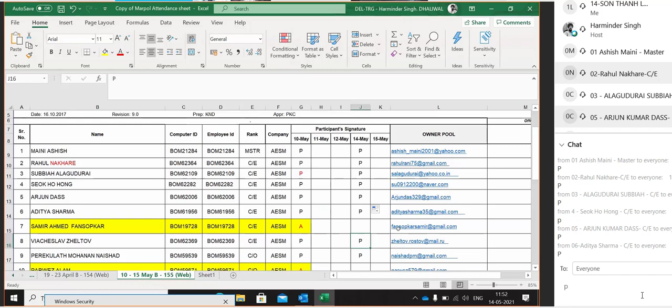Has anyone of you sailed on vessels with scrubbers? Anyone of you have sailed on vessels which have been fitted with the scrubber? Mr. Rahul Nakre, thank you.

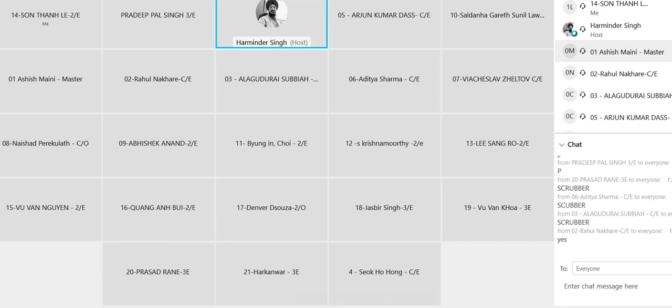Would you please switch on your mic and video also if you want to? It's up to you. Would you please share your experience as to whether the installation was done at your time, and how was it running the vessel with the scrubber? Any problems that you faced, etc., etc.?

So I was there for the installation itself, and then I sailed with the vessel for 1 month after that. In that 1 month, we did not face any major problem, but the system there, it was an open loop type system. So all the effluent was sent outside only, and it had two scrubber towers, three big seawater pumps, and then there was one dilution pump also.

And the water was just from bottom, it was pumped up to the top to the lines, and then there was a return line which had got a leak detection system also, in which if there is pipe leakage or scrubber is leaking, then a separate tank will get filled, and it will trip the seawater pumps. So there was monitoring of pH, turbidity, and PAH. And these all things were recorded. So that is how the system was working.

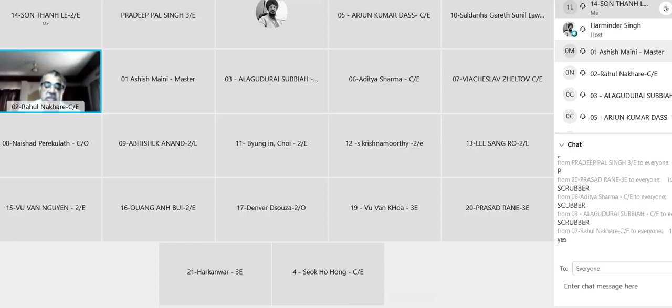We only had one problem during rolling. The scrubbing water was overflowing into the leak-off side. That's why at that time the pumps had tripped. But otherwise, there was one small leakage due to improper workmanship in China. That one scrubber, the outlet sensor for pH, that fitting started leaking. So these were the minor problems faced. But later on, I heard there was a problem with the expansion bellows which are fitted on the exhaust side. Those were giving up in a very short duration of time.

Hello. Anything regarding record keeping and all? Record keeping we have started, but the date was not yet due. So there was a complete logbook for it, record logbook. All the values that I told you, recording the flow rate, the pH value of incoming seawater inflow, their pH and turbidity was measured, and at the outlet, where it was discharged overboard, pH, PAH, and turbidity was recorded.

And then there was maintenance like monthly calibration, then annual calibration. There are different test gases also provided.

Yeah, this is very important because this is again an NPDES requirement as per the US laws. That's so good. Thank you, sir, for sharing these. I'm sure people will find this information handy. And also, while I'm discussing scrubber, if you feel you can add a point or two, I would appreciate it in between. I would stop and then you can chip in your points in between also. Yeah, sure, sir, sure.

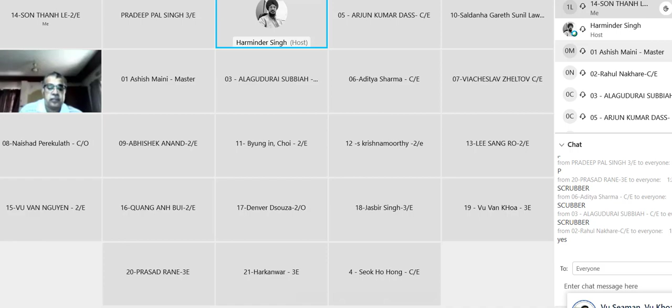So let's begin with the scrubbers in this session. So scrubbers, as you know, is largely referred to as the exhaust gas cleaning system, that is EGCS, exhaust gas cleaning system.

Okay, now just a minute, let me pull the PPT out so it becomes easy for you. Are you able to see this on your screens? Kindly confirm.

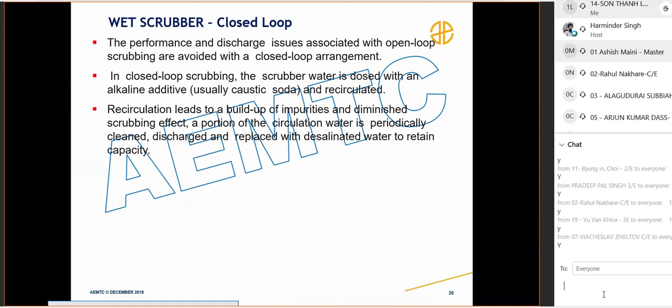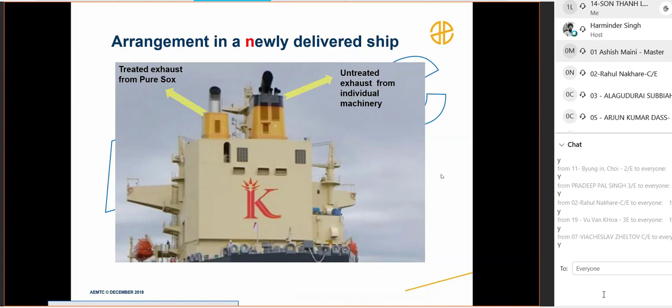So can you see this? This is not pure SOX. Pure is the brand name of the scrubber, so don't think it is a pure SOX or something. I hope now you are familiar with the look, how it would look externally. Can you please confirm?

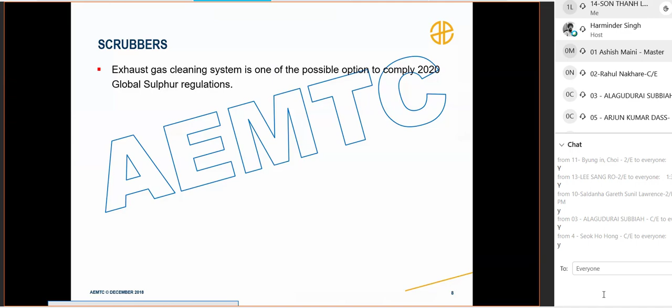So let us now have a look at scrubbers and one by one we shall try to understand things. Exhaust gas cleaning system is one of the possible options to comply with the 2020 global sulfur regulation.

So 2020 global sulfur cap is what? 0.5% sulfur by weight is to be used on the fuel that has to be used on ships all over the world, except for the ECA areas where for compliance you need to burn fuel of 0.1% sulfur. So this is the global cap on sulfur, and this is the ECA area sulfur cap. Is that clear?

Good. So, are you aware of... that I'll talk about a little later.

Scrubber is a device installed in the exhaust system after the engine or the boiler that treats the exhaust gas. Actually, the name suggests scrub. Scrub means to clean, isn't it? So it is basically cleaning the exhaust gas.

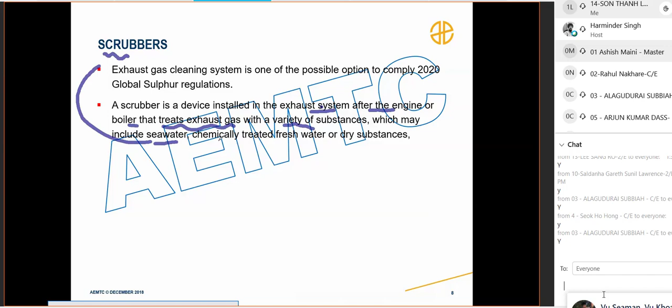It treats the exhaust gas with a variety of substances. That substance could be seawater, used for the purpose of cleaning, or chemically treated fresh water. Now the term chemically treated fresh water, why? And then dry substances, okay.

See, once you are using seawater for the purpose of cleaning, seawater can be discharged overboard after complying with the MARPOL regulations. However, if you use fresh water, you cannot just clean it once and throw it out, isn't it? Fresh water comes at a cost, so you would rather try to use it in many cycles.

And exhaust gases are corrosive in nature, we all know that. So the acidity of the clean water or fresh water that you are using for scrubbing, once they come in contact with the exhaust gases after scrubbing, will get acidic in nature. So we need to bring down the acidity, or we need to add alkalines into it. That is why you would be adding chemical to make it alkaline or to bring down the acidity of the clean water or fresh water, so that we can use it over and over again for a number of cycles before it becomes so contaminated that we need to discharge it ashore.

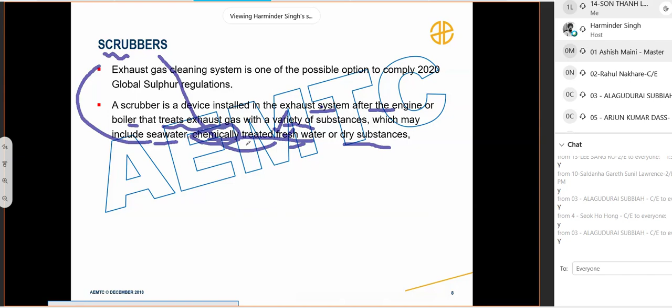Clear? You understand why chemically treated fresh water now? Please confirm.

The goal is removing most of the SOx from the exhaust and reducing particulate matter. This is the essence of fitting an exhaust gas scrubber, or the so-called exhaust gas cleaning system. What we want to bring down from the exhaust is the SOx, that is sulfur dioxide and trioxides, and the particulate matter that is coming out of the exhaust.

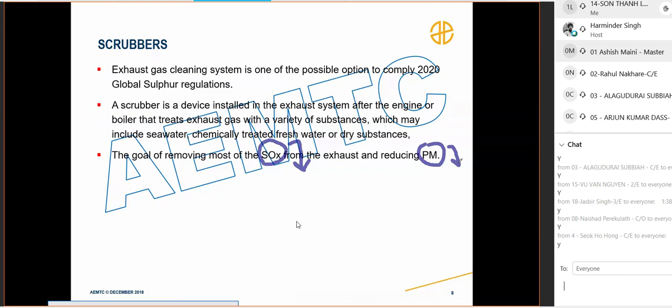All these scrubber technologies create a waste stream containing the substance used for cleaning purposes, plus the SOx and particulate matter which has been removed from the exhaust. So while the exhaust gas is cleaned, a stream of waste is generated. Let us say you are using seawater to clean, so seawater will be mixed with the SOx and particulate matter, and this will comprise the waste stream.

So as and when I show you how this waste stream is generated and where it goes, you'll get more clarity on it in the subsequent slides.

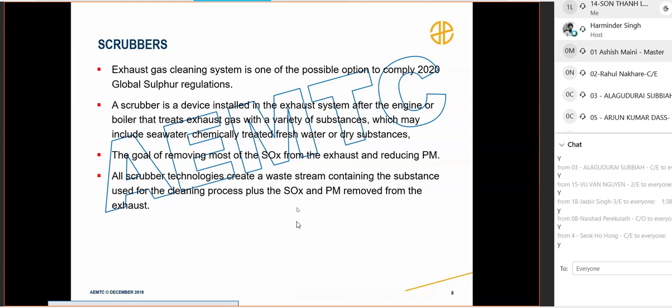The wastewater stream and generated sludge has to be processed. We just cannot throw out this wastewater stream that is generated out of the scrubbers into the sea. There is an IMO regulation or IMO guideline that we need to adhere to before we can actually discharge this waste stream overboard. Is that clear?

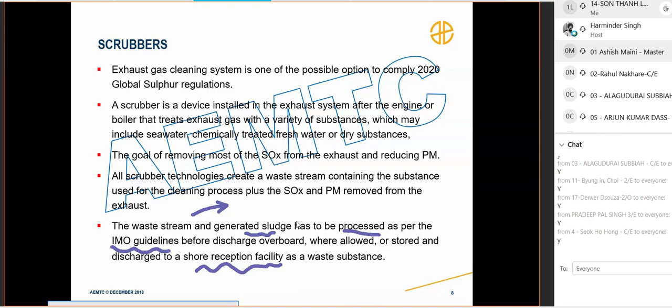Okay. Or what we can do is discharge it to the shore reception facilities, which of course comes at a cost.

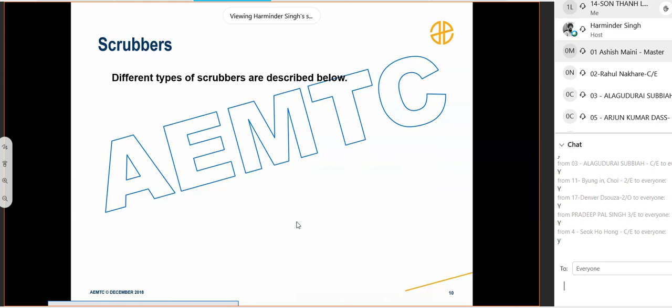A scrubber may either be a wet scrubber or a dry type of scrubber. The dry type of scrubbers are seldom used in the marine industry. You will not find any ships which have so far been fitted with a dry scrubber.

However, for the purpose of cleaning in dry scrubbers, we use lime granulates. But these are seldom used because we need to have a separate storage tank for these lime granulates, and then we need to discharge it ashore. So a lot of complications are involved with it, and these are then not preferred.

However, just a second.

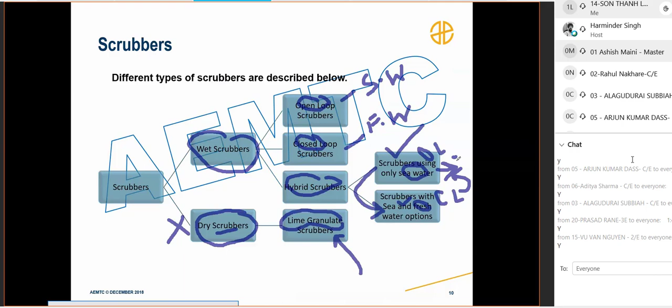Good. So just a short brief on the dry type of scrubbers. Although not a single such scrubber has been installed on a ship so far, lest you come across it, we'll cover this slightly.

Dry scrubbers do not use water or any liquid to carry out the scrubbing or cleaning process. It exposes hydrated lime treated granulates to the exhaust gas, meaning the granulates are in one place and the exhaust gas is made to pass through them, to carry out the chemical reaction that removes the SOx compounds. The exhaust does not pass through water. Since no water cleaning is done, the exhaust will not get cooled down.

In wet type scrubbers, since it is done using water, obviously the exhaust gas going out will also be cooled. But in dry type scrubbers, cooling will not occur. That means we can fit the scrubber even before the exhaust gas economizer in the exhaust piping system. So that is the only advantage - it gives flexibility of fitting a scrubber wherever you want in the exhaust system.

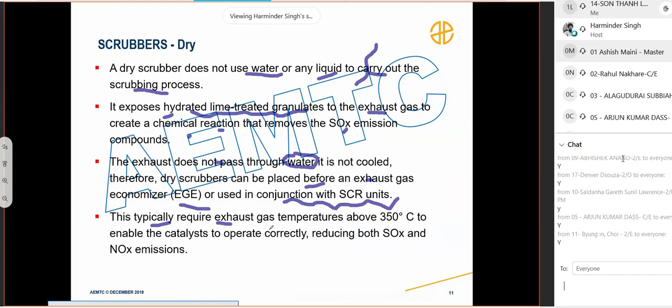So a dry scrubber can be placed before an exhaust gas economizer, or used in conjunction with SCR units for NOx control. This typically requires exhaust gas temperatures above 350 degrees centigrade, because it utilizes a catalyst that works best at and above this temperature. Is this part so far clear?

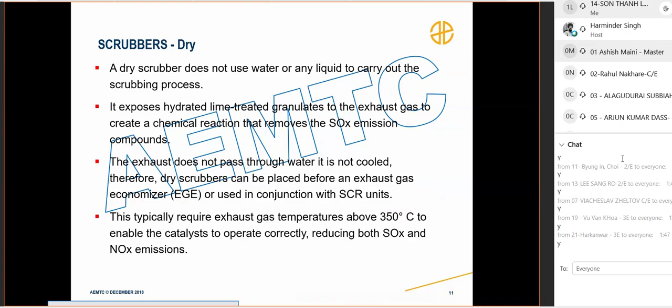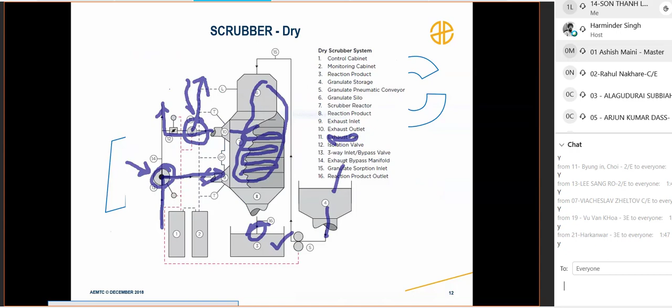Further, you will see that the waste stream, whatever is there of the granulate silo, is also being generated. Once this granulate silo is used, it has to be stored. So we need to have so many tanks for the fresh granulate silo lime and for the stored material, and that is why it is not often used on ships.

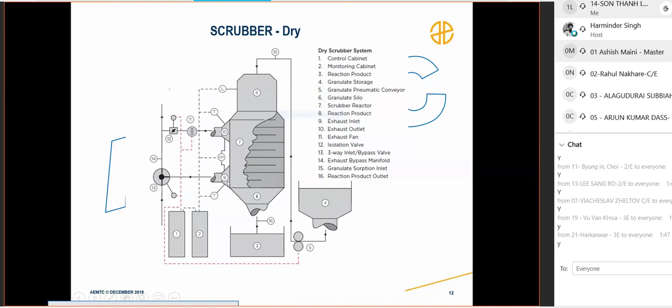Now talking of the wet type of scrubbers, the exhaust gas passes through a liquid medium in order to remove the SOx compounds from gas by chemically reacting with parts of the wash liquid. The system can either be open loop, which uses seawater, or closed loop. Hybrid systems offer both methods of scrubbing. The most common liquids are untreated seawater and chemically treated fresh water.

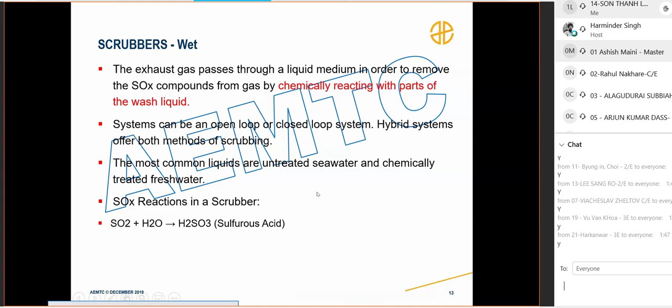So the SOx reaction in the scrubber is that SOx, when it comes into contact with the water, forms sulfurous acid, which is corrosive in nature, which then further reacts with oxygen to form sulfuric acid. So this is how a wet type of scrubber works.

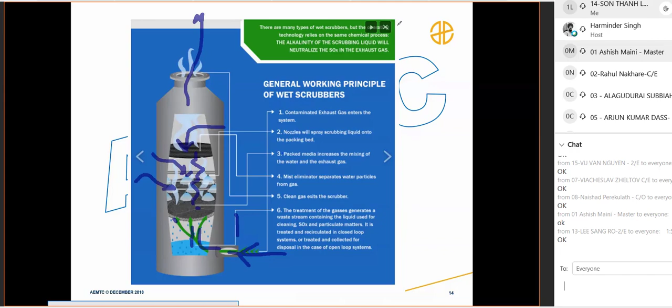Now, an open loop arrangement scrubs the exhaust gas directly with seawater, which is then legally discharged as per the regulations into the sea. If it is an open loop system, you see only what you are using is seawater for the purpose of cleaning. Obviously, the cost is less, and the operating cost of running such a scrubber is going to be less. This involves the least amount of equipment, which means lower investment cost and simpler installation. Likewise, it would also mean the lowest possible operating cost since there are no consumables involved.

However, an open loop scrubber system may not perform adequately in waters which are high in acidity or which have low alkalinity content. See, try and understand: the seawater is being pumped into the scrubbers, cleaning is carried out, and then the seawater is thrown out. Now, if the incoming seawater itself is more acidic, what cleaning will it carry out? Because it will combine with the sulfuric acid of the exhaust gas more and more, and its cleaning efficiency will go down.

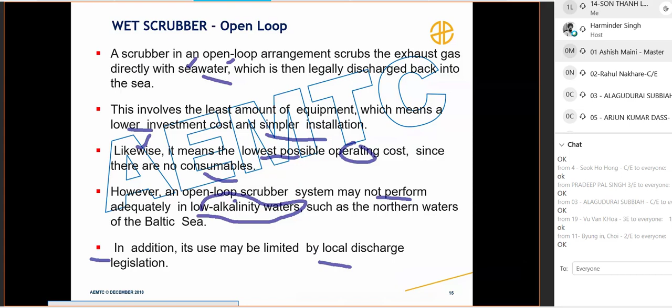Moreover, you will see that open loop scrubbers are largely discouraged by the countries. So far, any question? If no question, just type in NQ.

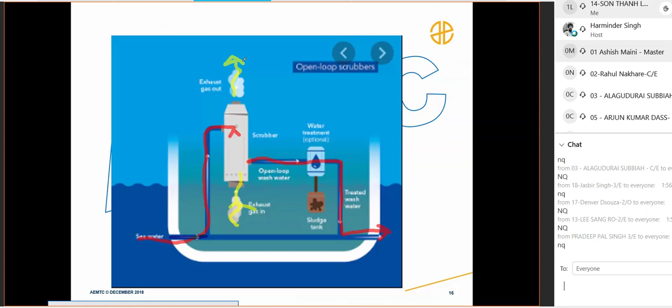So exhaust gases which are clean will be coming from here. Exhaust gases from the engine, from the main setup, will be coming from the bottom and will pass through. Please confirm if the open loop structure is pretty clear to you.

So you can easily see here the nozzles are there for the purpose of spraying the seawater. Then the demister is there on top. Exhaust gas comes, it is cleaned in the process, and the clean exhaust gas goes up.

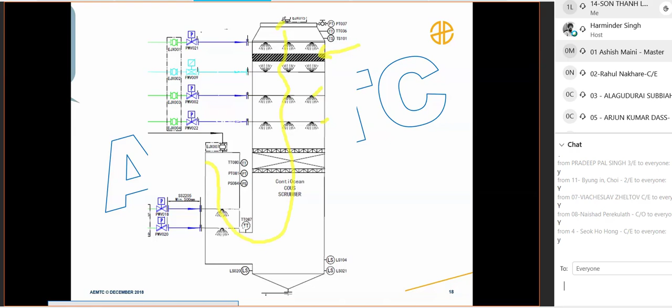So I have a question. Yes, please go ahead. Is this the same working principle as the inert gas system? In reality, the gas going out will be inert gas, is that correct, just without the sulfur dioxide? Yes. Our purpose is to remove sulfur dioxide and particulate matter, isn't it?

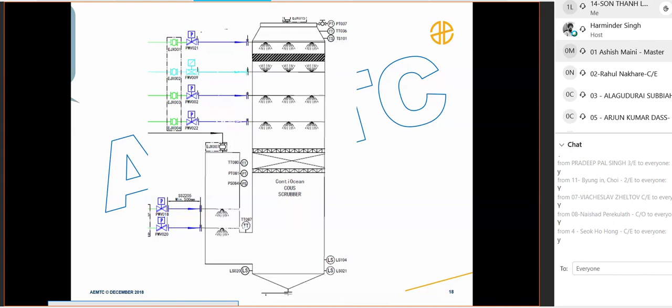Okay, let us now look at the wet type of scrubbers. Open loop. There is an issue with the open loop scrubbers. If the seawater itself is less alkaline, as is the case when operating the vessel in the Baltic Sea, then the efficiency of this type of scrubber largely comes down.

So what is the solution? So what we do in the Baltic Sea, if you go towards the north, you will see that the acidity increases, or the alkalinity decreases.

So the solution lies in, let us say, either you can switch over to the compliant fuel, that is 0.5% sulfur, and put the scrubber out of use. Or if you wish to use a scrubber, then it would largely depend upon... just a second.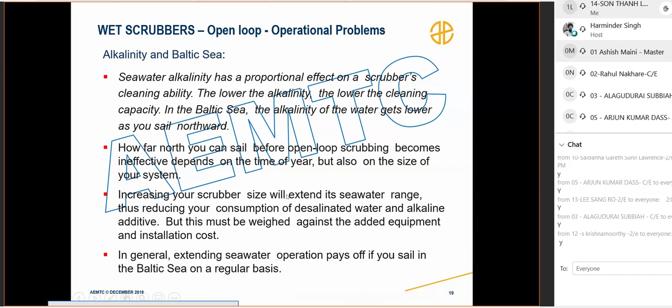Now let us talk about the other type of wet scrubber, that is the closed loop scrubber. The performance and discharge issues associated with the open loop scrubber mean that its use is limited by the outside seawater available for cleaning. But when you are using fresh water in a closed loop system, this issue is no longer there.

So in closed loop scrubbing, the scrubber water is dosed with an alkaline additive, usually caustic soda, and it is recirculated. The fresh water is recirculated over and over again. So as and when the fresh water starts to become acidic, more and more caustic soda dosage is added. So this is being recirculated.

Obviously, you are using fresh water which comes at a cost, and then you are also using the alkaline additive in the form of caustic soda, which also comes at a cost. So can I say that the closed loop scrubbers are obviously going to have a higher operation cost compared to the open loop scrubbers? Do you agree with me?

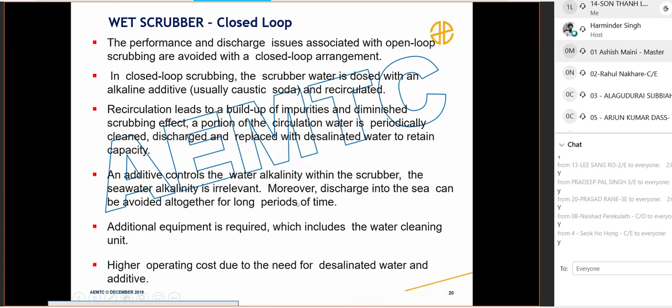This is how a closed loop scrubber would look like. You can see the seawater simply comes in, cools the fresh water, and goes out.

Whereas the fresh water is continuously circulated, it gets cooled, it is sprayed from the nozzles here, cleans the gases, and is taken into the process tank. This processing tank also has a freshwater addition point. If any freshwater needs to be replenished, it can be replenished here. Else it can go on recirculating, and of course an amount of alkali is dosed into it.

So this goes on and on till such time impurities build up to a level that you can no longer use this water. Then you can head it to the water treatment unit where it can be treated and made fit to be discharged ashore or to the sea, or you can even land it ashore to the shore reception facility. So this closed loop scrubber is clear to you?

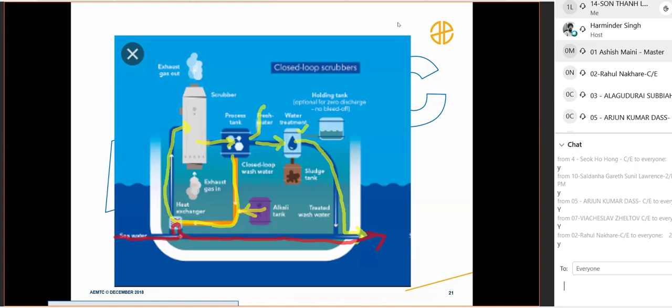Hybrid scrubbers offer an arrangement which is an ideal compromise between the cost efficiency of open loop scrubbing, which can be done at high seas, and operational security of the closed loop scrubber, which you can do in the restricted waters of the ports.

That is why hybrid scrubbers are very popular. In a hybrid scrubber system, both open and closed loop modes are available, ideally at the push of a button. Simply put, a hybrid system operates in open loop mode whenever possible, which reduces the operating cost.

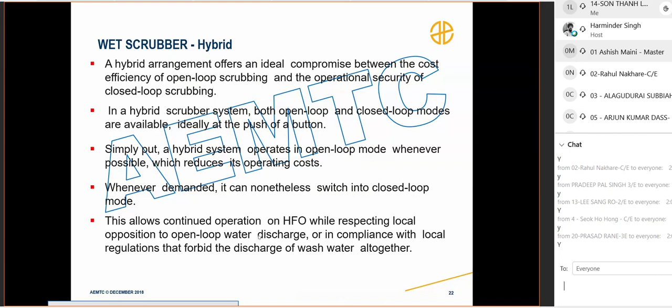Now let us study the environmental impact of these scrubbing systems, or the exhaust gas cleaning system, or the scrubber, versus the use of low sulfur fuel.

Marine SOx scrubbers are generally of the wet type. This means they scrub the exhaust gas either with seawater or with desalinated fresh water plus an alkaline additive. In the process, SOx is first dissolved and ionized, then oxidized into sulfates. So the end product that is formed is a sulfate.

These sulfates are a natural part of both the seawater and aquatic organisms. This means for the seawater flora and fauna, sulfates form an integral body part, so they are harmless to the environment. Hence they can be discharged overboard, so the discharge problem is sorted out. The only thing we have to monitor is that the water being discharged is not too acidic. Do you agree with me?

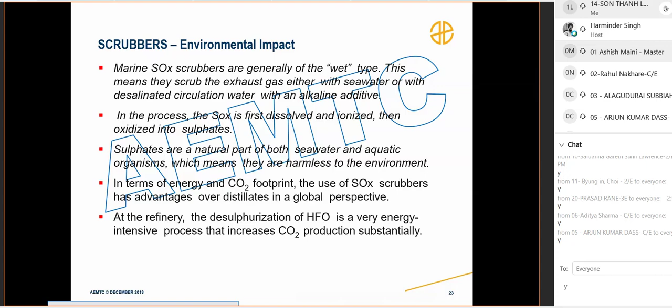You can see that this again contributes to an increase in CO2, so even low sulfur fuel causes harm to the environment. But with the use of scrubbers, this desulfurization process is not required at all. You can directly use high sulfur fuel in the scrubbers, which would at least reduce the CO2 emissions. So it is a win-win situation, both environment-wise and cost-wise. Do you agree with me?

Let us now see a few things regarding scrubbers. When we are using scrubbers, some additional things are also to be fitted. Dry scrubbers need a lot of handling space for storing lime and gypsum, so they are not preferred. The lower portion of wet scrubbers handles corrosive acids, particularly where the effluents are discharged. The waste stream is discharged from those portions, which handle highly corrosive acids and chlorides, so they may get wasted away very quickly.

That is why a special class-approved duplex stainless steel material is to be used. In some ships, the stub pieces on the overboard side valve gave way and a lot of water came inside. So a lot of these things can happen. To prevent this, you will see that on the exhaust side, the effluent side, stainless duplex steel material is specifically used for the pipeline and for handling these.

Scrubbers may need a bypass arrangement to exhaust gases for the period when the scrubber is not in use. So if you are not using the scrubber, let's say you have changed over from the scrubber to compliant fuel, like suppose you go to California. In California, they say even if your scrubber is good, you cannot use it, so they have banned the use of scrubbers.

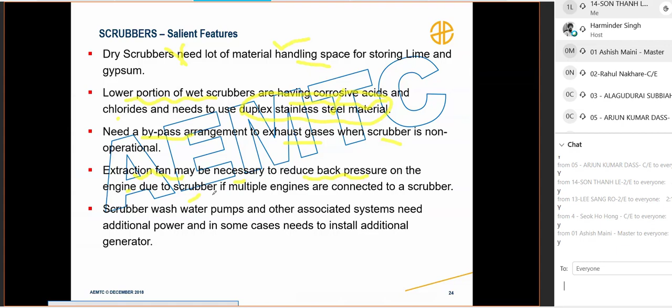Extraction fan may be needed to reduce the back pressure on the engine due to the scrubber, if multiple engines are connected to a scrubber. Scrubber wash water pumps, additional pipeline system, seawater pumps will be required, and energy consumption will be there. For that, maybe an additional generator is required, or a higher capacity generator may need to be installed. So these are a few things which a scrubber would need.

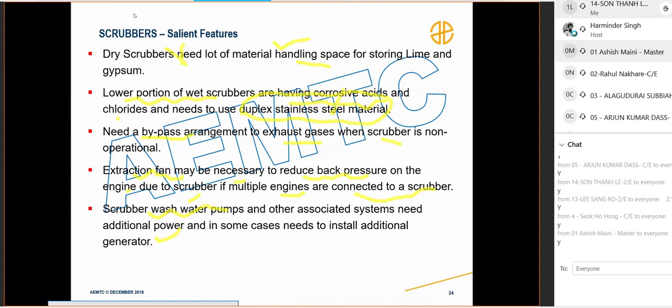Is this part clear to you so far? If it is, please confirm okay. Please confirm okay. Is it getting too boring, or are you understanding things? Is it getting too boring? Let me know.

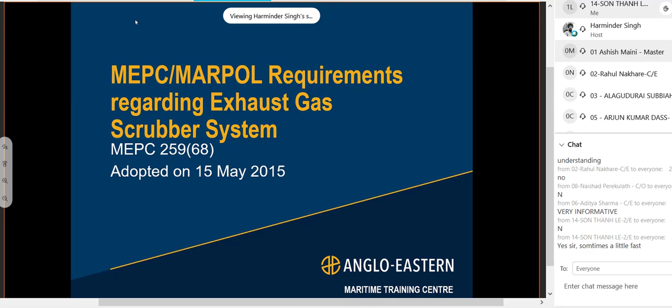Similarly, how can we say that the discharge going out of the scrubber is equivalent to or as clean as the low sulfur fuel discharge, or 0.5% fuel discharge? There has to be some parameter governing that. Do you agree with me? Yes or no? We can only compare two things if there is some parameter which says, okay, this is a discharge from the low sulfur 0.5% sulfur fuel, and if your scrubber is cleaning the exhaust gas and you are claiming that it is cleaning, your parameter should be at least so much equivalent. Then only can we say that your scrubber is as good as the use of low sulfur fuel.

So what is that parameter? Any idea? What is that parameter - the alkalinity of water, the turbidity of water, and the pH value? Okay, these are the parameters which are governing the discharge of the waste stream into the water. But my question is, I'm talking about the clean air. How can you say that the air emanating from the scrubber is as clean as that of the low sulfur fuel?

So the gas going out is monitored. The SOx percentage is measured, even CO2 percentage is measured, and then the ratio between CO2 to SO2 is also calculated. Very, very good - exactly, that is the point. So let us have a look at what is that ratio first. Let us move on to that ratio first and then we will see.

Then only can we say that our scrubber is as good as the low sulfur fuel. So this is what is being monitored on the air side. Clear? And on the waste stream side, we need to check the acidity - so pH value we will be checking. We need to check the pH value and turbidity. We will come back to this part when I explain you in detail about this. Okay.

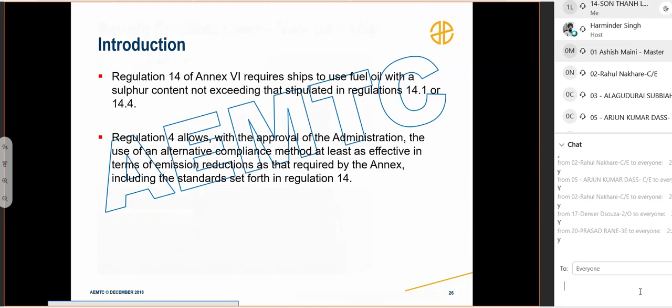Now, the scrubbers that are installed on the ship can either be of scheme A type or scheme B type. So when you go on the ship, have a look at the certificate, and you will be able to see whether it is a scheme A type of scrubber or scheme B type.

Scheme A type of scrubber is the one in which there is unit certification, that is the unit is certified with parameter and emission checks. That means the unit is certified by the administration as fit for use, but you have to monitor the parameters and the emissions manually.

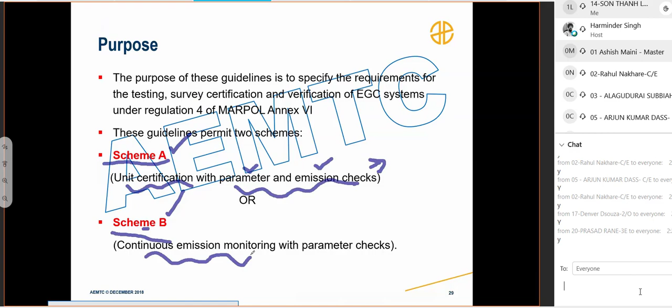However, the scheme B type of scrubber is the one in which continuous emission monitoring with parameter checks is there. That means automatic monitoring of the emissions and parameters is available continuously on the screen. Such types of scrubbers are most popular and generally installed, and you will see that they come under the category scheme B.

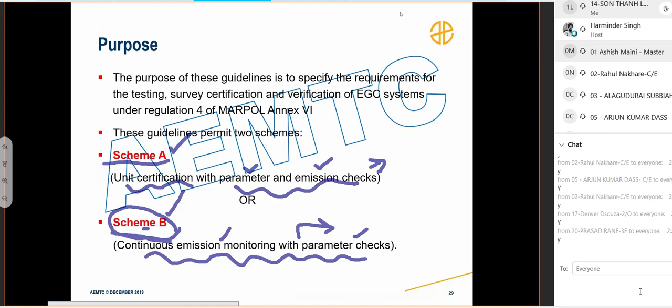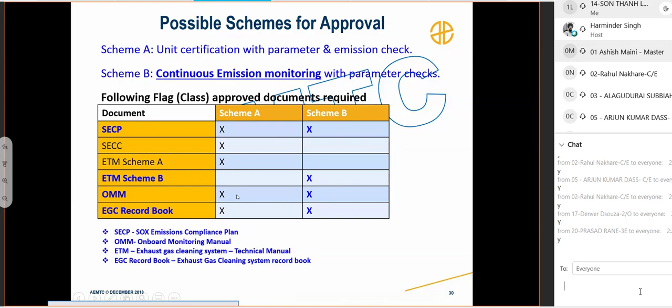Now, scheme A and scheme B, more or less the documentation part is the same. You will have a SOX emission compliance certificate which will be there in scheme A, but for scheme B it will have a different plan. Similarly, the exhaust gas cleaning system technical manual will be different for scheme A and scheme B. Then the onboard monitoring manual will also be different for scheme A and scheme B. And then of course, the exhaust gas record book also needs to be there. So the exhaust gas SOX emission compliance plan has to be there on the ship. So you will see this documentation part differs between scheme A and scheme B.

Now, for all the ships which use an exhaust gas cleaning unit or scrubber unit, there should be this SOX or sulfur emission compliance plan which has to be approved by the administration. So it should be class approved.

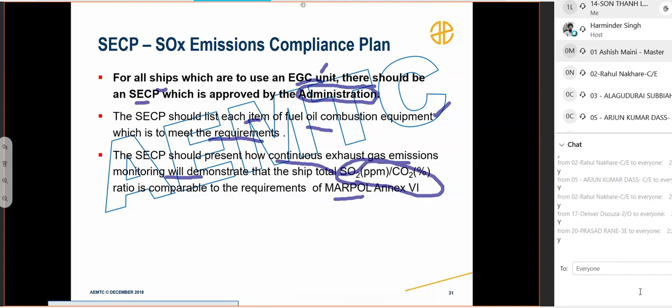The SECP should list each item of the fuel combustion equipment which is to meet the requirements. It means that in the fuel system, whatever can affect the discharge or functioning of the scrubber, or may alter the SO2 to CO2 ratio, will be listed in the SECP plan. The SECP should present how continuous exhaust gas emission monitoring will demonstrate the ship's SO2 to CO2 ratio is comparable to the requirements of MARPOL. That means continuous monitoring will be there on your screens.

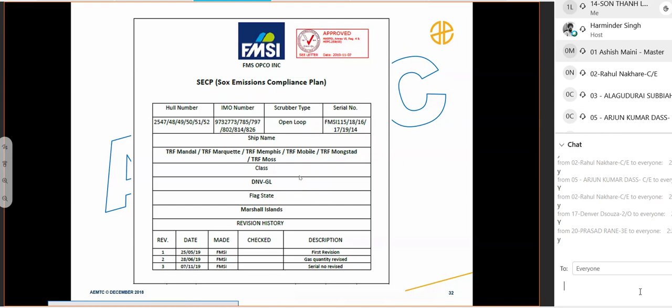This is how an SECP or SOX emission compliance plan would look like. So identifying the ship first, it has to be class approved, and it will carry the following information. It would recognize the ship, and tell what all combustion units it is handling, like main engine, generator 1, 2, 3, boiler. Then the exhaust gas cleaning system configuration would be there, whether it is scheme A type or B type.

Compliance principle of compliant fuel, whether the scrubber fitted on board complies with the 0.5% sulfur emissions, or can also handle the 0.1% sulfur emissions applicable in the ECA area. Then it will also tell there will be one declaration in this plan, an exhaust gas declaration. I will show you that declaration also, and it has to be approved by the administration.

So let us have a look at that declaration which is there in the exhaust gas cleaning system plan. Now this is a declaration which says the mass flow capacity of the scrubber is 32.3, whereas the scrubbing of the main engine at 80% load has a mass flow rate of only 13.5.

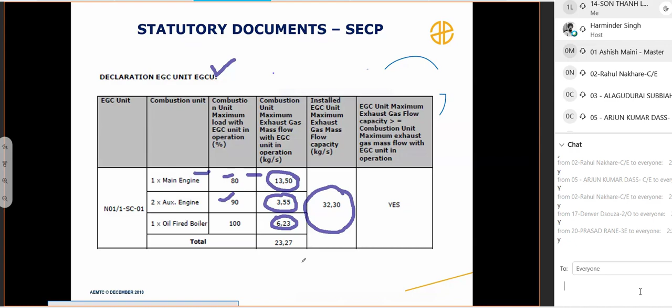With two auxiliary engines in operation, the mass flow rate is only 3.55, and for the oil fired boiler it is 6.23. So if you add up all these three, the total comes to 23.27, which is less than the actual capacity of the scrubber. So the maximum exhaust gas flow capacity should be greater than or equal to the combustion units providing this exhaust gas. If it is more, then this declaration says yes.

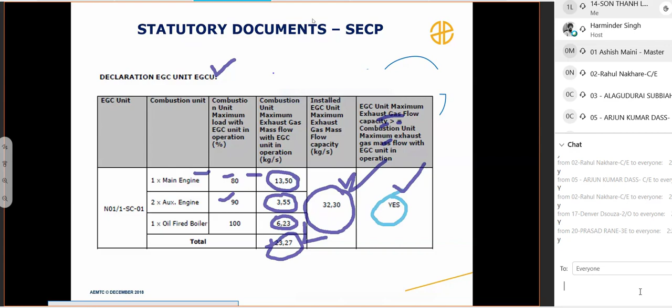Is this part clear? So you will find this declaration is there in the exhaust gas cleaning unit's SECP plan. Is that clear?

So likewise, the parameters that you need to monitor on the air side are these, whereas on the water side you need to monitor the pH, the PAH and the turbidity. The pH value gives you an indication of the acidity of the discharge, whether it is acidic, alkaline or neutral.

PAH value is actually the polycyclic aromatic hydrocarbons, wash water, whatever is going overboard. So this gives an indication of the oil sheen, whether the discharge you are doing is capable of forming an oil sheen or not. So we have to keep it under control.

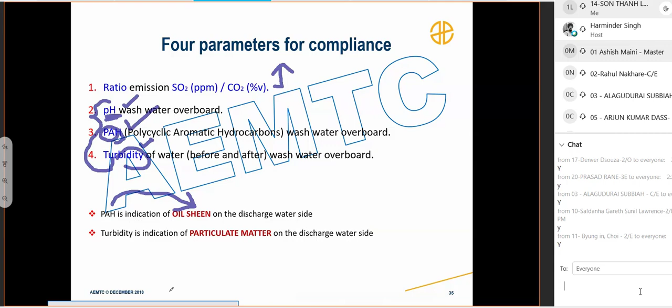Clear? Similarly, turbidity is an indication of the particulate matter, how much is going with the waste stream or wash water outside. So turbidity indicates particulate matter going outside, and hence we need to monitor it before and after. Since the seawater is coming in, we need to measure pH and turbidity of the incoming and the outgoing seawater.

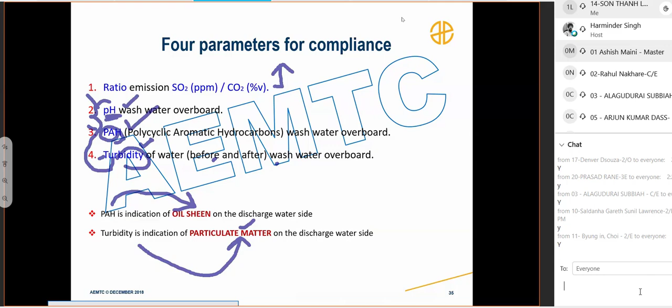So I will show you the kind of system that is being installed. Before that, let me tell you that the minimum allowable pH value is 6.5. So you need to keep it acidic. Beyond that, you cannot go. The PAH value should be 50 micrograms per liter above the inlet PAH.

That means we need to measure the inlet PAH value, and the outlet PAH value should not exceed more than 50 micrograms per liter of the inlet PAH value. Is it clear?

Regarding turbidity, the outlet value should not exceed 25 FNU above the inlet water turbidity. That means we need to measure the inlet turbidity also and the outlet turbidity also. Is this clear?

If it is clear, please type OK. Any question, any query till now?

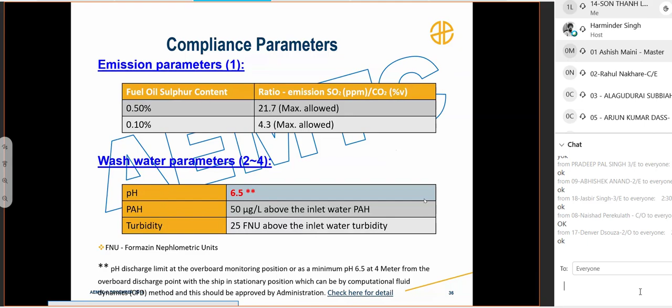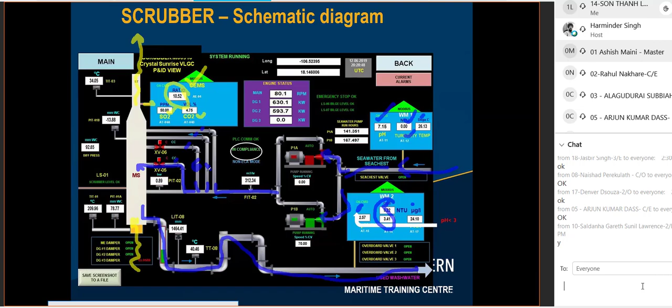This is the sensor which is fitted to measure SO2 and CO2 on the funnel side. Sensors need to be calibrated from time to time as it is a requirement under NPDES.

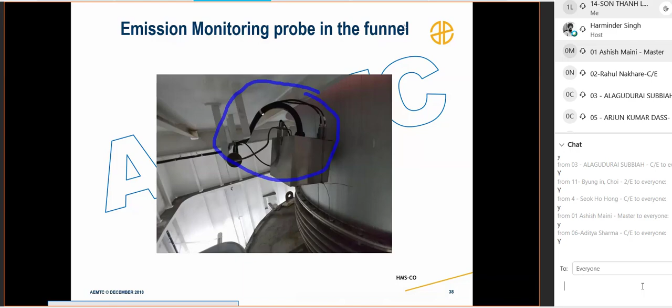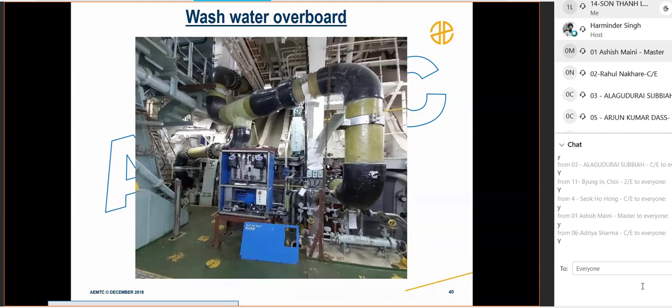Okay, so far so good. Now let us see this screen. What does it show? This is a monitor which you will see is generally installed on the outlet side, a local monitor. So it will show you the same values, SO2 to CO2.

Now a lot of values are being automatically recorded: engine load, SO2 to CO2 and their ratio, UTC time and ship's time and position, exhaust gas cleaning whether it is in bypass mode or operation mode, exhaust gas inlet outlet pressure and temperature, scrubbing water pressure and flow, seawater, washwater monitoring, cabinet flow alarm, and of course the pH, turbidity and the temperatures.

A memory chip in the system retains the latest, or the last 18 months, of records, just like what happens in the OWS memory chip. So far so good. Any doubt regarding this?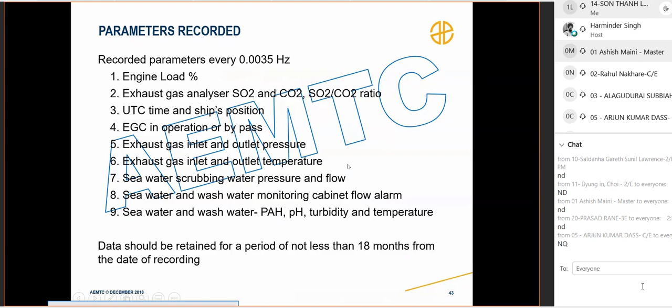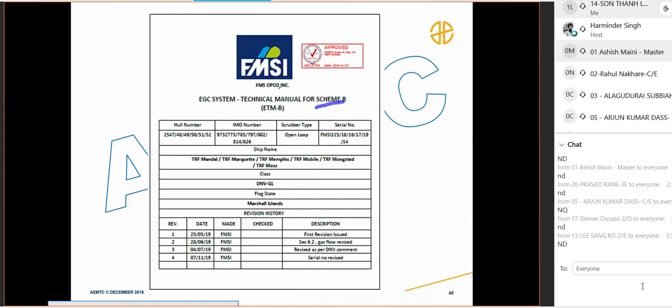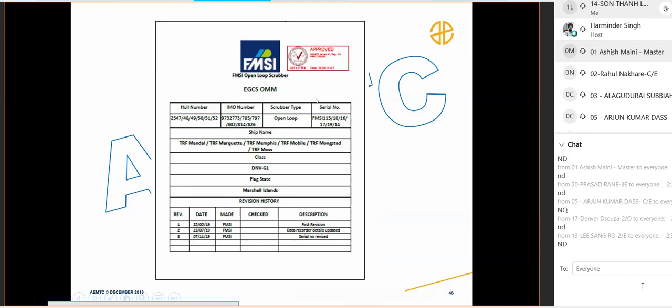Okay, so you have seen the SOX compliance plan. Now this is the manual for scheme B, the technical manual for scheme B, which is class approved. Then this is the operational maintenance manual, again class approved. And then there is the EGCS, the exhaust gas cleaning system record book, or the scrubber record book.

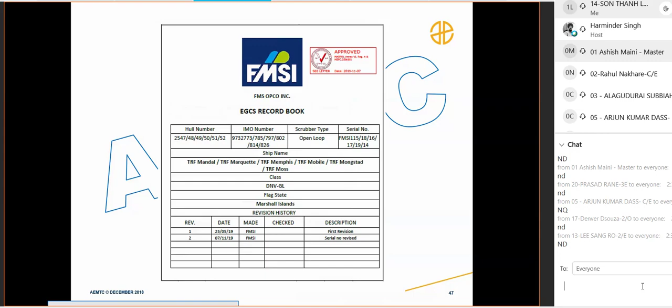Now regarding maintenance records, what records do you need to keep manually? The records we talked about so far are being automatically recorded in the system of scheme B type. There is one record, the exhaust gas cleaning record book, which you need to maintain if the unit is fitted, if your main engine is fitted with the scrubber system.

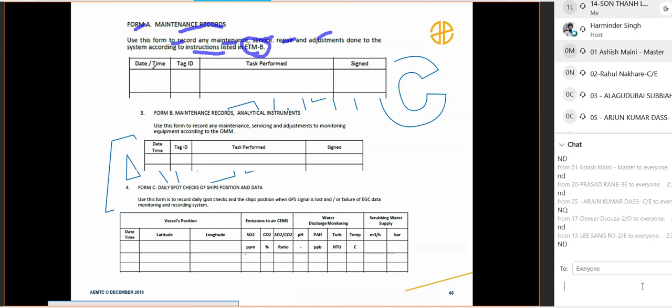So form A you will be using for the maintenance records. Use this form to record any maintenance, service, repair, or adjustments done to the system according to the instructions of the technical manual. But if you are making adjustments or doing maintenance as per the OMM manual, then you will have to record it in form B of the record book.

In form C, you will have to record the daily spot checks. At least once in a day you can do it, or whenever your exhaust gas cleaning system fails, or if your GPS signal is lost, then you need to record all these things. Otherwise the data is recorded automatically all the time. You may just record it at least once in the record book in 24 hours.

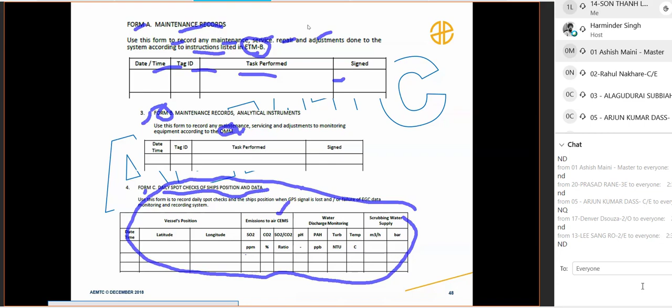Then whenever you land ashore for these samples, use this form to record the lab results as well as normalized values for nitrate. So whenever you're landing ashore for getting nitrate values, you can record it here in form D. Form E is operation recording.

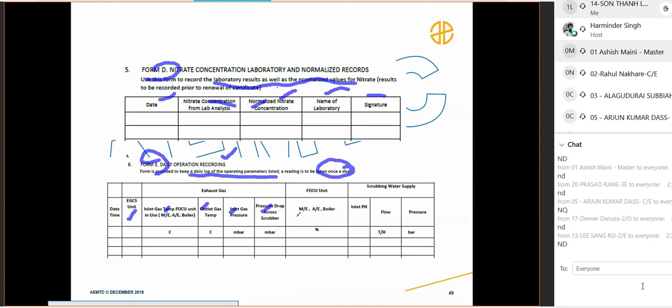This form is to keep a daily log of operating parameters. Reading is to be taken at least once a day, like outlet temperature, inlet pressure, pressure drop across the scrubber, the load of the main engine, generator and boilers, inlet pH, flow pressure, and these things are to be recorded.

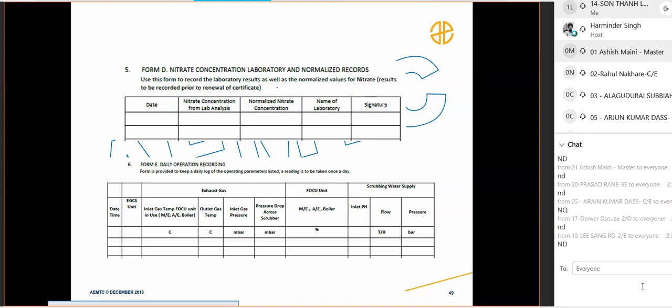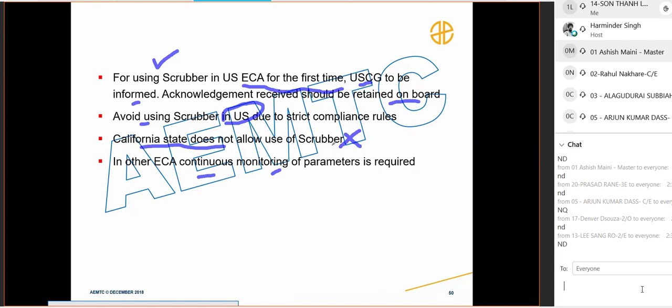Avoid using the scrubber in the US. That's what our company says, because there are different states in the US with different compliances. So as much as possible, be on compliant fuel rather than use scrubbers in US waters. In California, as I told you, they have banned the use of scrubbers. You cannot use them; you have to use compliant fuel only. And when you go on shore, you will have to go on shore power. In other ECA continuous monitoring of parameters is required.

Now what will happen if a scrubber fails? If a scrubber fails, you will have to rectify the fault within 1 hour and keep it in use, else you will have to change over to compliant fuel. Our company's standing orders are that you should carry at least 3 days of compliant fuel in your tanks, lest the scrubber fail, so that you can change over to compliant fuel and use it till the problem is sorted out, or till more fuel can be supplied to the vessel.

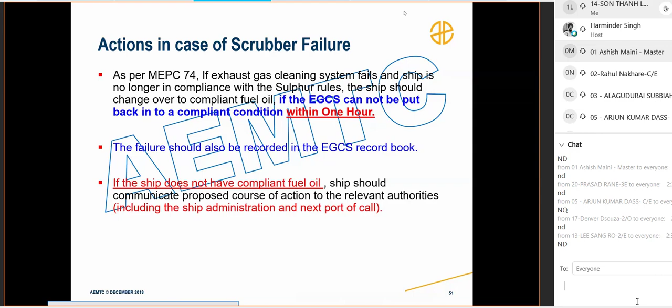This failure is also to be recorded in the record book of the EGCS. So if the ship does not have compliant fuel and the scrubber fails, then you will have to take flag dispensation. You will have to inform all the authorities, and that of course should be done by the office on their side.

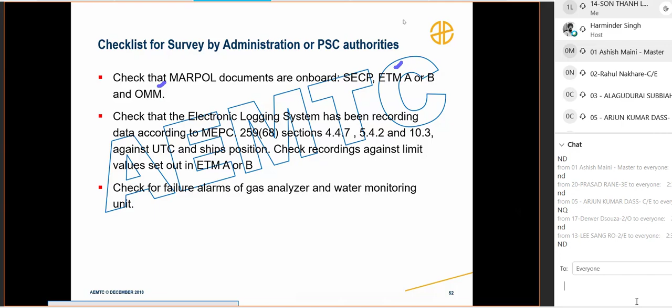So check for the MARPOL documents. That means you should have SECP, ETM A or B and OMM manual. As I told you, MEPC requirements are there with respect to the calibrations of the scrubbers, and failures of these are to be monitored. So I hope this sums up your scrubbing system. Any queries, any questions that you have, I can take now.

If none, then please type in no questions.